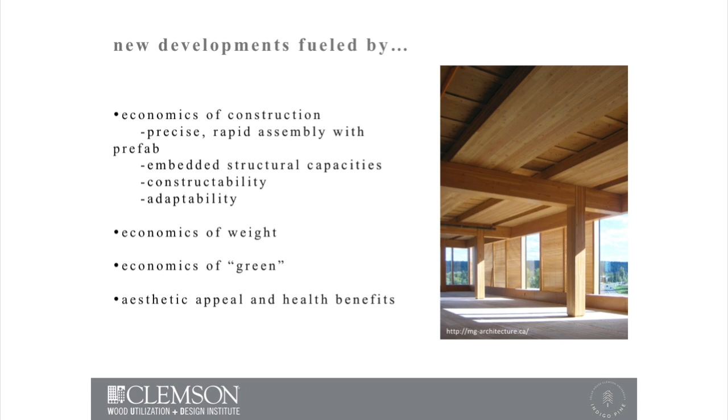And then there's just the aesthetics and the health benefits. Jeff mentioned this morning some of the humidity regulating benefits. There are other studies done by, for example, FP Innovations up in British Columbia that look at the appearance of wood and its effect on regulating stress indicators. So there's some good research out there on health benefits related to wood usage in our interiors.

These developments and the expanding use of wood and timber systems are enabled by our building codes, which have grown more accepting of mid-rise and hopefully eventually high-rise construction. The acceptance and recognition of CLT and massive timber within Type 4 construction is a considerable development.

And then there's CNC milling technology. CNC stands for computer numerical controlled. We've had CNC machines for years, 3-axis machines, meaning X and Y and up and down. 5-axis machines that are more prevalent in the massive timber world have all those functions plus a rotational axis in each direction. So without having to take big pieces off the bed, you can flip them around and drill. The technology is there to do really sophisticated operations from the production standpoint.

Some of the sustainability benefits - we won't rehash this in depth - include the renewability of wood as a material, the life cycle assessment and embodied energy part of the equation, and carbon sequestration. All of these things are motivating this shift, which has been happening for years in Europe and then into North America, particularly in the Northwest, and it's migrating down. This resurgence - somebody used that word earlier, Steve did - of wood and timber construction.

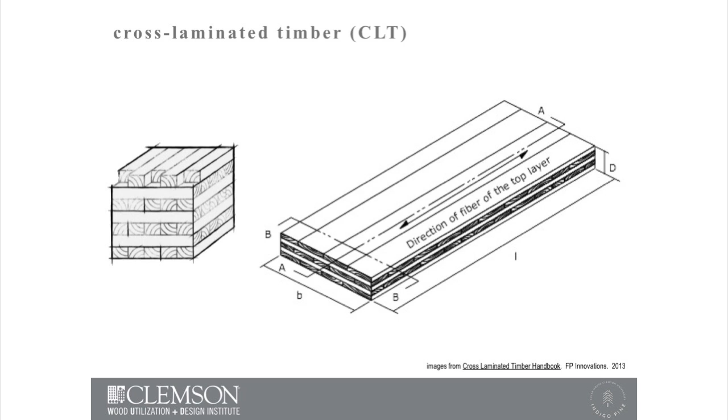So you're getting the benefits of cross-lamination, which provides greater dimensional stability for these panels. It's incredibly strong, incredibly lightweight relative to competitors like precast, and it's really exciting. Things like doors and window openings can all be pre-processed and pre-cut using the CNC capabilities we have. So you're looking at a game changer in terms of on-site construction time.

Looking again at the advantages: the prefab, the ease of installation, that's shorter on-site construction times with really small crews - we'll look at an example. In those scenarios, CLT becomes a very economical choice for mid-rise projects, any project with repeatable units, where there's embedded economy in producing repeated wall sections. Prefabrication also provides unparalleled quality control and unparalleled precise tolerances.

The bidirectional aspect of CLT makes it capable of larger spans without additional structure. It's also very strong in shear, et cetera. So there's the carbon sequestration we mentioned, and it's very lightweight, which by comparison allows for reduced sizes on the foundations. That's considerable - not to be overlooked in terms of economics.

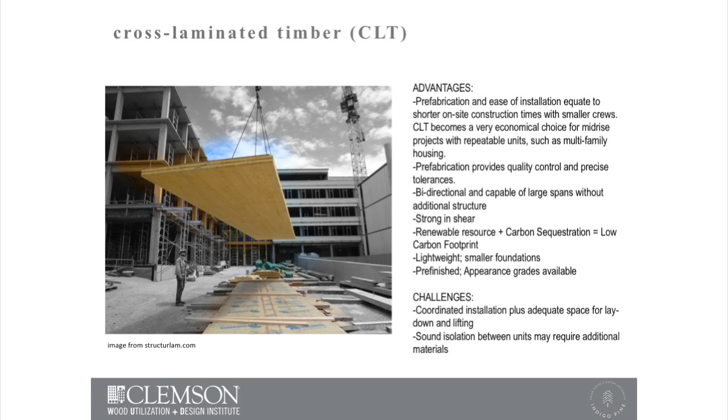Challenges, as with any large-scale prefab system, include the coordination and installation on site, making sure you have adequate space for laydown, et cetera. Another big one is sound isolation between units, and we'll see in one example a common way of providing sound isolation between floors, whether in an office structure or between floors in a residential application. I mentioned the CLT handbook - this is produced by FP Innovations and is available to download for free online.

So this is a project, 24 Murray Grove. It's in London, an apartment building designed by Waugh Thistleton Architects. The CLT panels came from KLH, which also has an office in London, but I think they were produced in Austria for this project. This was one that really started to make waves internationally and raise the level of interest here in the United States.

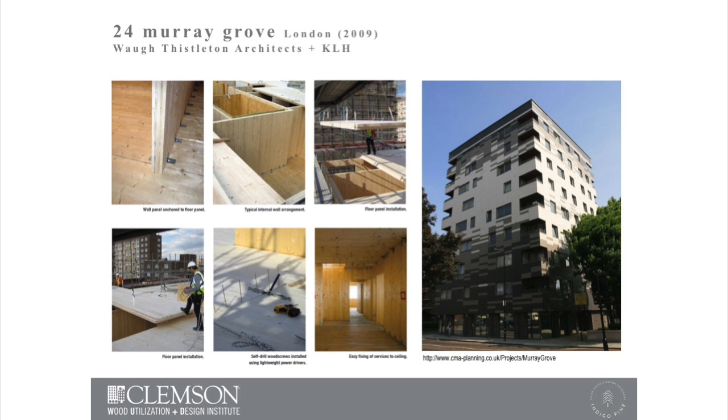So you see some images here from the construction, and I'll start to dig into a little bit of the metrics. So it's 8 stories of CLT framed apartments above, again, a non-combustible first floor, in this case concrete. The 8-story CLT framing was completed in 27 working days with a crew of 4 people, which is really mind-boggling. This crew of 4 included the crane operator and 3 others who were just maneuvering the panels into place and fastening everything down. So again, super rapid construction with small crews.

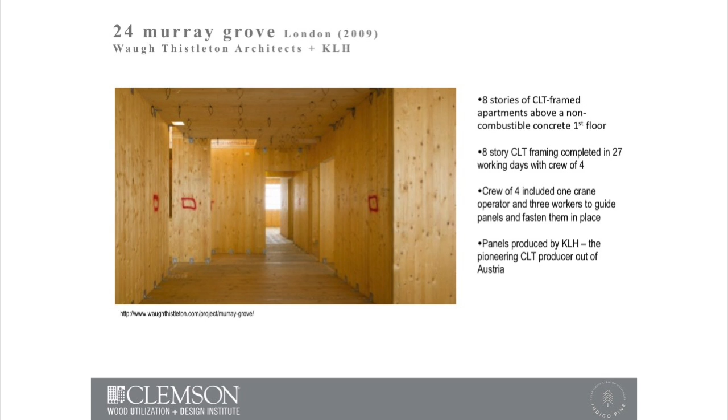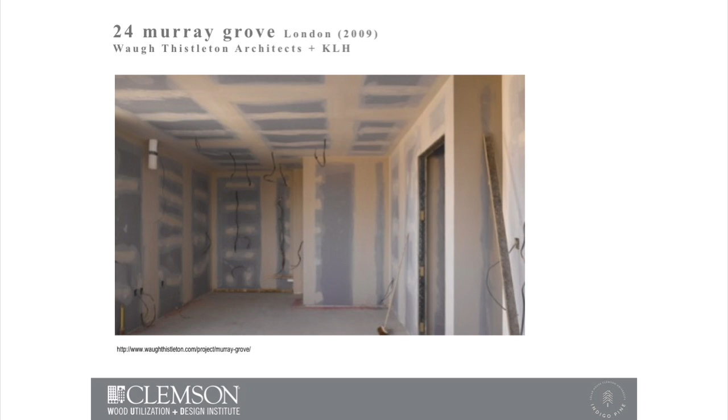So that's cross-laminated timber in a nutshell. We'll see maybe 1 or 2 other projects here in a moment. Another variation on that, again, it's a massive timber system. Solid wood is nail-laminated timber, or NLT. This is produced - this is a good diagram, and it comes from StructureCraft. StructureCraft is a producer of massive timber products in Canada. So in this case, rather than gluing and rather than the cross-lamination, you're just stacking these edgewise and nailing.

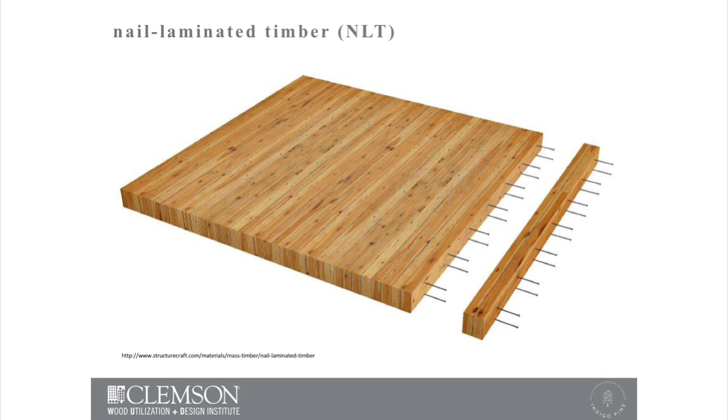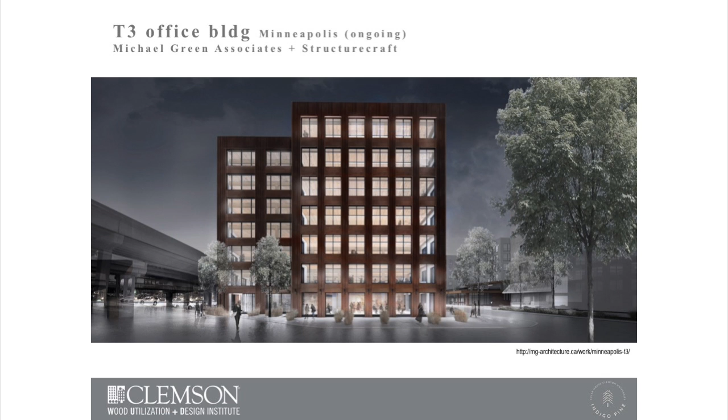So this is the T3 office building in Minneapolis. You see a rendering here. This will be a 7-story construction, over 200,000 square feet, using a combination of nail-laminated timber as well as glue-lam. You see the glue-lam kind of post and beam structure here underneath, and then there's the nail-lam panels for the floors. Now what you'll notice is that these floors are topped with concrete.

So there's a concrete finish layer that is, well, it's more than a finish layer really. This works as a composite system, but the concrete in particular is used for sound isolation. That helps add mass and helps increase both the IIC rating and the STC rating, which are influential for these massive timber applications. STC is airborne sound transmission, and IIC is structure-borne sound, so footfall, vibrations, and those kinds of things. So a lot of times what you're seeing with these leading-edge architects working with mass timber are these kinds of hybrid uses of materials for these purposes.

There's approximately 3,600 cubic meters of wood used in the structure. That equates to around 3,200 tons of carbon sequestered for the life of the building. The timber erection is scheduled to be completed in just 2.5 months, so that's an average of 9 days per story for the timber frame. And then you see some of the other metrics there as far as quantity of panels, and so on and so forth. In this case, most of the wood is beetle kill pine, so it's a good way to reuse that material.

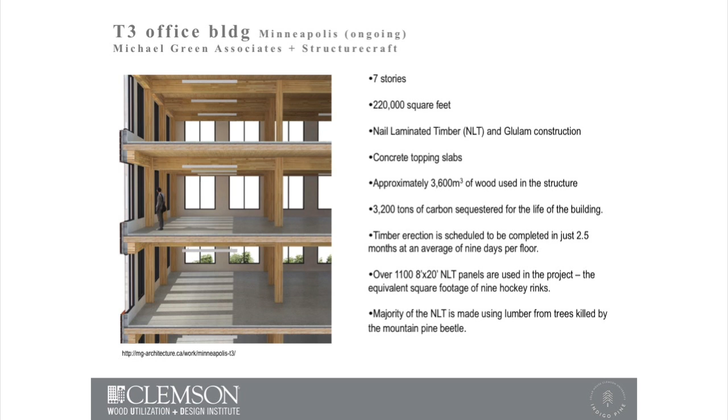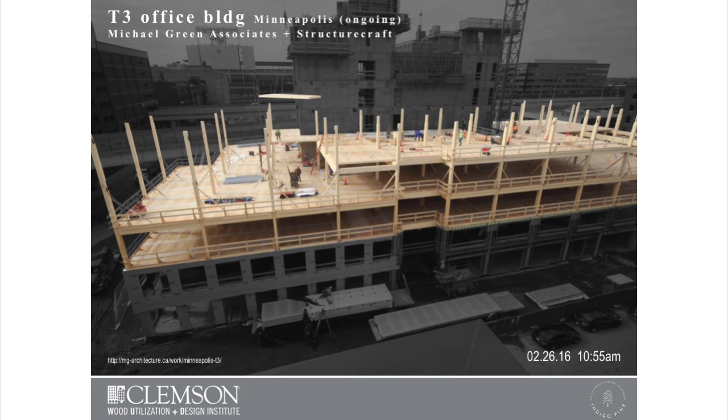Here's an image - this was from Michael Green's website, they've got snapshots from the construction. This was February 26th of this year, around 11 o'clock in the morning. So you can see some of the non-combustible construction below, and then they're coming up pretty rapidly with this wood frame construction. What you don't see are lots and lots of crew - again, it's a light crew and really rapid on-site work. Here's the crane operator doing his thing, and then a couple guys here to help guide these into place. If you look carefully, you can see the nail lam lined up edgewise, and that's how that system works.

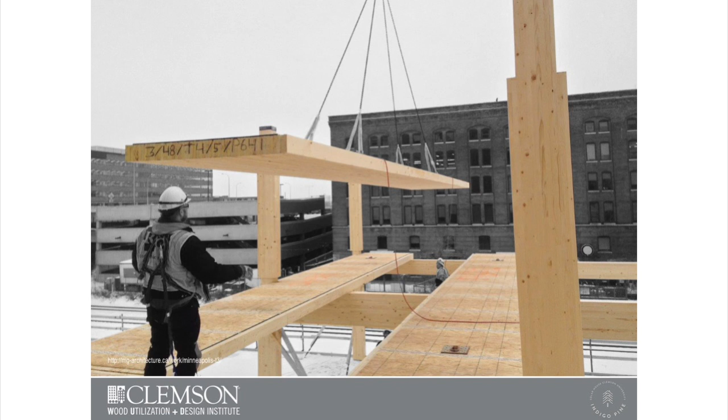Another similar system to nail lam - we've all seen and touched glue lam, beams or rafters, that kind of thing. Structurecraft in particular is now making glue lam panels, so they work like the nail lam, but they're glued instead with really high strength adhesives. Adhesive technology is something that we started to look at here at Clemson as well, just the fire performance of those things. The adhesive technologies are getting better and better and greener as well to support the larger movement in the industry.

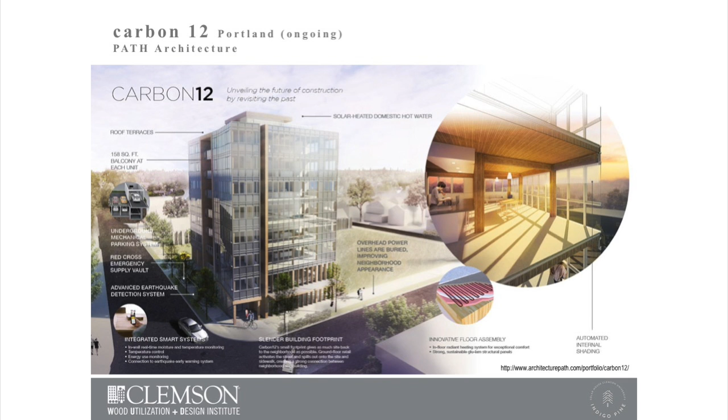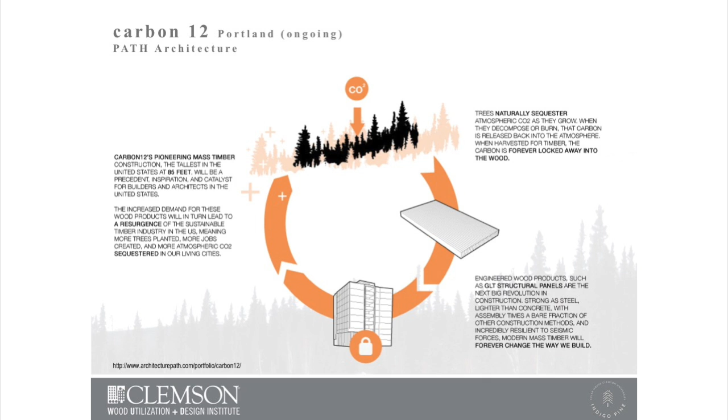This is a new project ongoing in Portland by a group called Path Architecture. The development's called Carbon 12. You see some of this is a snapshot from Path Architecture's website, getting into detail for their clients, assisting the developer in raising awareness of the environmental benefits of this approach. The next image describes the life cycle benefits, the carbon benefits of wood, carbon sequestration, the things we've been learning about today. This is really a part of the marketing for these types of systems, driving these technologies forward. That's Carbon 12.

This comes from a report from Dovetail Partners, and they borrowed this table from Rethink Wood, a really great resource sponsored by the Softwood Lumber Board. This is just a listing of some of the tall timber structures that are already out there or going up currently. Steve mentioned the project at University of British Columbia, I don't know if that one's in this list, but you do see the Carbon 12 project.

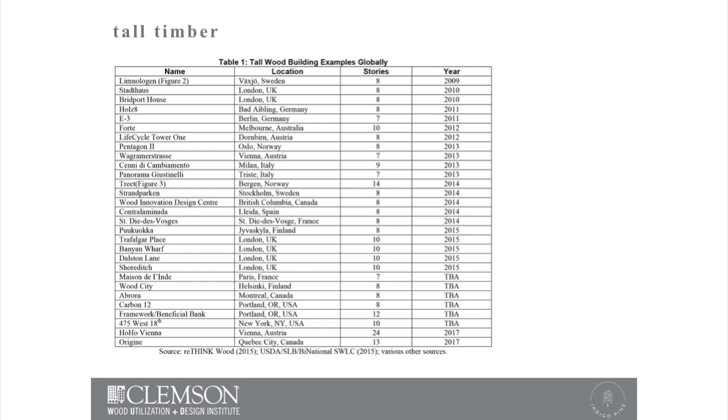It's a 24-story structure being constructed in Austria. I hope to visit that this summer. This is really a worldwide thing, motivated early on in Europe, but it's really moving to North America now. It's an exciting time to be in the wood industry.

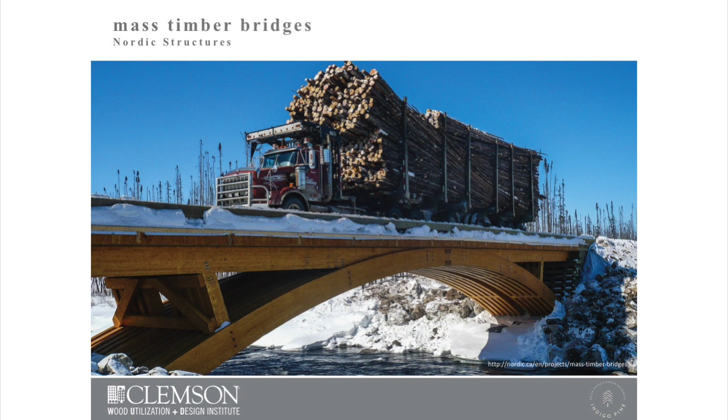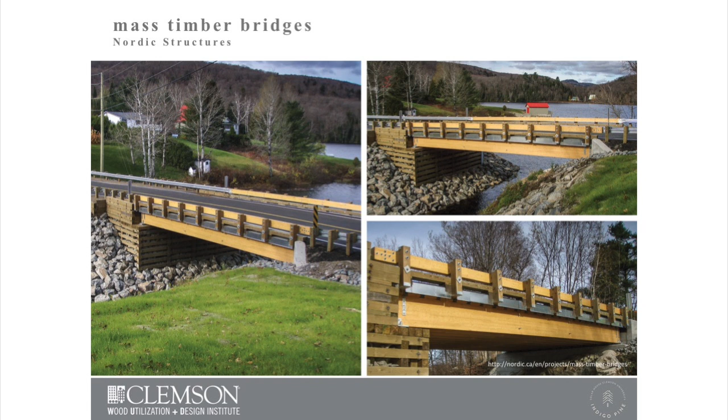There's another of their bridges. These things are erected very quickly. This is a smaller scale, and this one can be set on the abutments, similar to the video Pat showed, and you're in and out - it's super quick. Again, a great application for these technologies.

From Nordic's website, they talk about reduced delivery times using local sourcing, members and system size to the nearest millimeter - those really precise tolerances, drawing on current manufacturing technologies. Then there's the reduction in project duration - time is money on site, so really fast erection and installation times, no need for heavy equipment. This is where these things are competitive.

What's the preservative for those type of structures? That's a good question, Pat. I think that they're not preserved as we would call it - if I remember correctly, they're using a covering on them like asphalt or something like that, but I've not seen them in person so I'm not going to say definitively. They're not conventionally treated, and underneath they make sure they're not grounded so air can circulate. The adhesives they're using are exterior adhesives rated for all those kinds of applications. But that's a good question about the preservative.

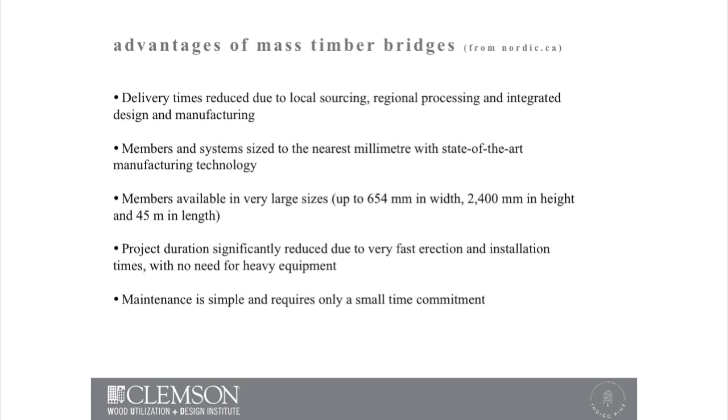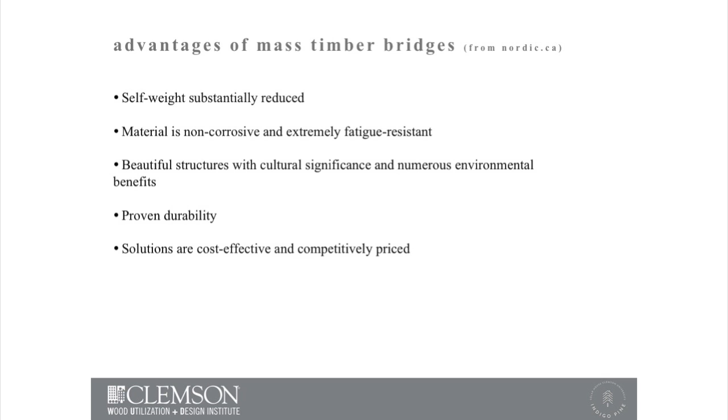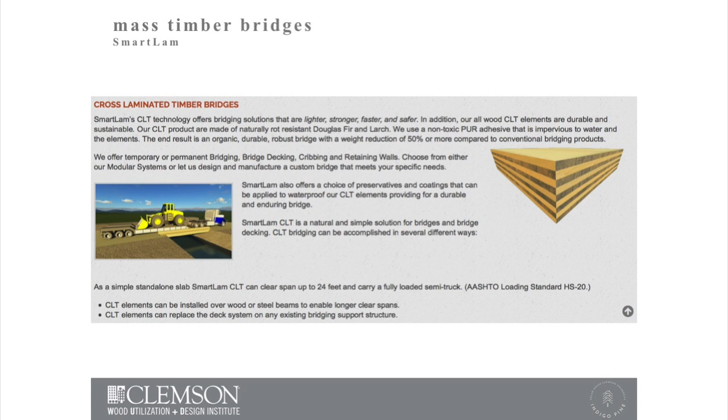And self-weight - we talked about the weight being substantially reduced, so on and so forth. Really great competitive advantages for these mass timber bridge systems. This, we saw the video from SmartLam - this is from their website, where they describe being able to span up to 24 feet, carrying a fully loaded semi-truck, with a reduction of up to 50% in weight. These things have a ripple effect in terms of applicability and viability compared to competing materials and systems.

Continuing with SmartLam, they're getting into modular systems, modular construction, offering modular shelters for ag applications, and modular loafing sheds, interestingly enough. We saw some of the modular barn structures that Pat showed earlier, just the renderings of. This is a really interesting group - we've had many opportunities to visit with some of the folks, and they're up to some interesting things.

I'm going to have the opportunity in the fall to work with John Blackburn, an alumnus of Clemson who works in Washington, D.C. and designs equine structures all over the United States. This is a prefab barn structure he's designed and is looking to market, combining dimension lumber with glulam posts and beams for larger spans. These are really exciting applications in the area of ag and equine. I'm looking forward to learning a lot from John this coming fall.

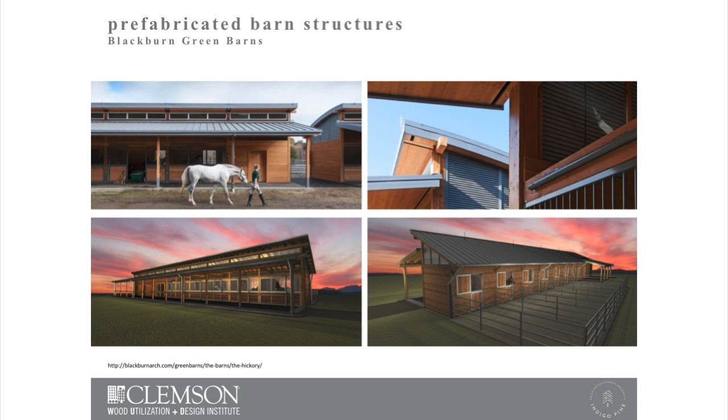More and more you're seeing it used, with this resurgence and interest in wood and all of its sustainable benefits, in park structures. I was just in Virginia helping my mom move, and just down the way from her was a really nice little glulam picnic shelter. So there's lots and lots of opportunities out there.

Glulam is something we're more familiar with versus CLT and some of the more cutting-edge systems, but it's all in the realm of mass timber, and there's a range of applications for this stuff.

Just really quickly, some of the things we're working on here at Clemson: we're looking at cross-laminated timber using southern pine, something that hasn't really been studied extensively as we're working on it. There's some work at Virginia Tech, some at NC State. We had a master's student who graduated a couple years ago looking at long span floor systems that would sandwich glulam web members between two flanges of CLT. That's exciting - there's potential to integrate mechanical and plumbing systems into those cavities.

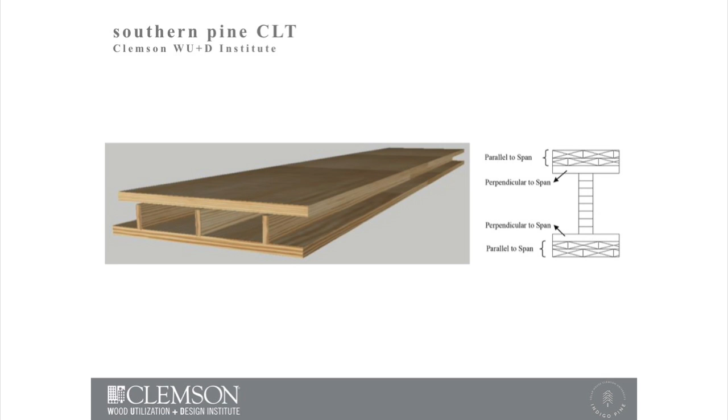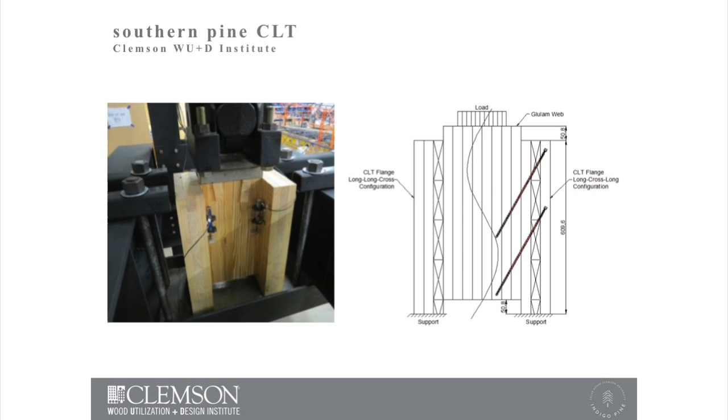We've done some pretty extensive testing through his thesis work on the shear capacity, the shear transfer from those flanges to the webs. He looked at both a glued connection and a mechanically fastened connection. That's an interesting area, and we're getting ready to do some full-scale tests on these panels. As I mentioned, we've done some fire-related testing and work, looking at the fire capacity of the different adhesives commonly used in the industry.

Pat alluded to some work we've done recently, more so in the area of light frame construction. This Simply is the name we've given to this really innovative plywood framing system. This was a system we developed for our entry in the U.S. Department of Energy Solar Decathlon competition. The DOE in this competition is really squarely focused on energy, on end usage of energy.

But they're not as interested in the embodied energy, the energy equation for moving these houses, these kind of modularly built houses, from point A to point B, and then moving the modules around with cranes on site. So we aimed to rethink and think more holistically about the energy. How can we work with a system more analogous to inline light wood framing that can be built on site rapidly, leveraging CNC technologies to their greatest advantage with respect to connection design.

So these things go together super fast. The frame of this house, which we call the Indigo Pine House, was put together entirely by students and faculty - unskilled labor - in 3 shifts, about a day and a half. We started a dry-in from that point. We imagine this as a flat pack type system that would come shipped with pictographic instructions, just like IKEA furniture. We've actually garnered a lot of interest from industry.

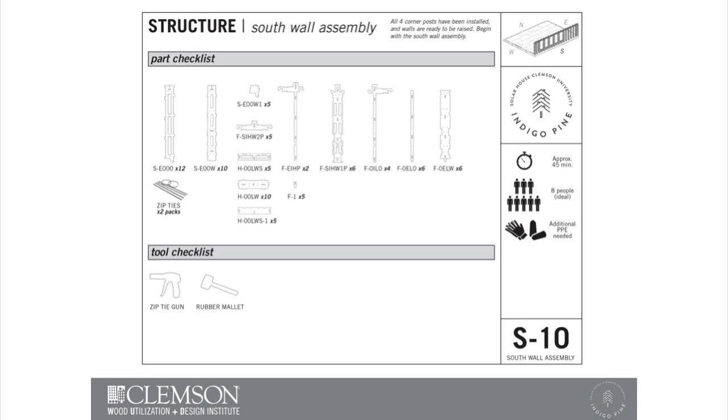We're continuing to develop the system. These are examples from the instructions for how this would go together - everything from the parts and pieces, all pre-labeled through the CNC processing, thinking about how many people it would take for different operations, and the type of safety equipment you need.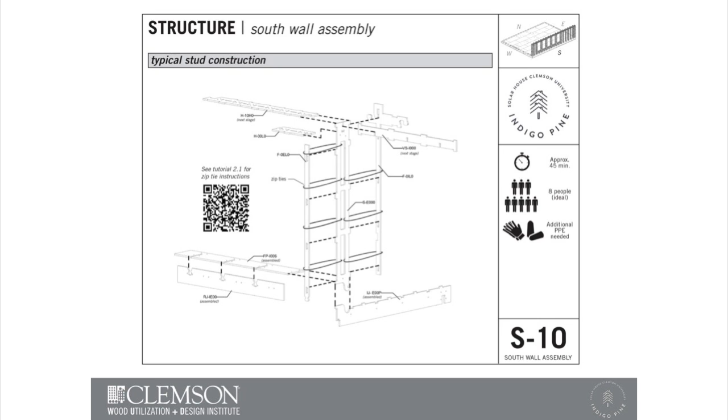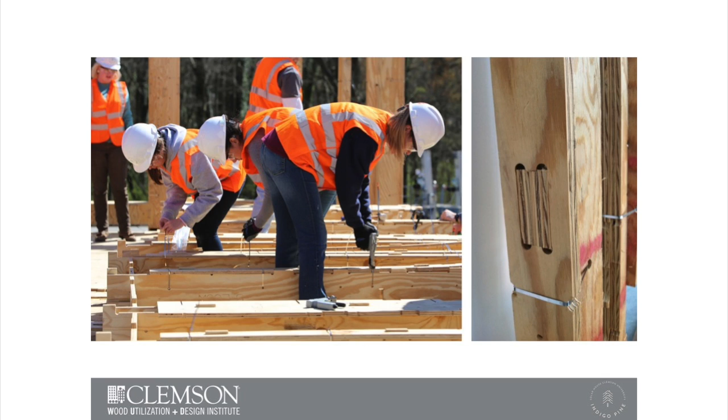There are even QR links to instructions and YouTube videos of how to do these. This system is held together without nails or screws, just steel cable ties, so it's fast, reversible, and non-destructive in terms of disassembly. We disassembled the entire frame and repackaged it in less than a day. So, again, the benefits of plywood.

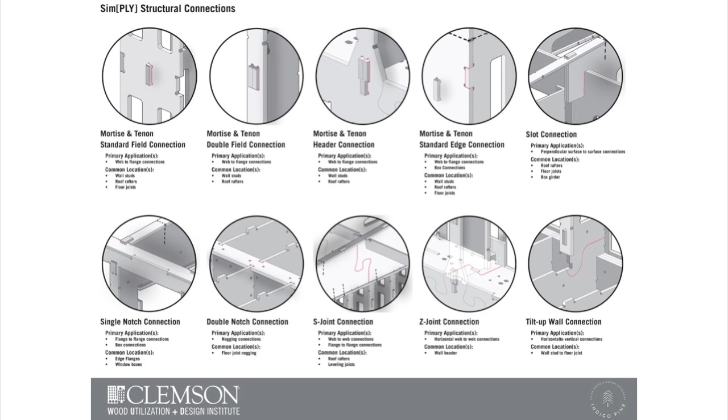Let's get through some of the joinery that we developed. The crop stop kitchens, one of those structures that Pat had alluded to, was built with the Simply system. This is in Greenville nearby.

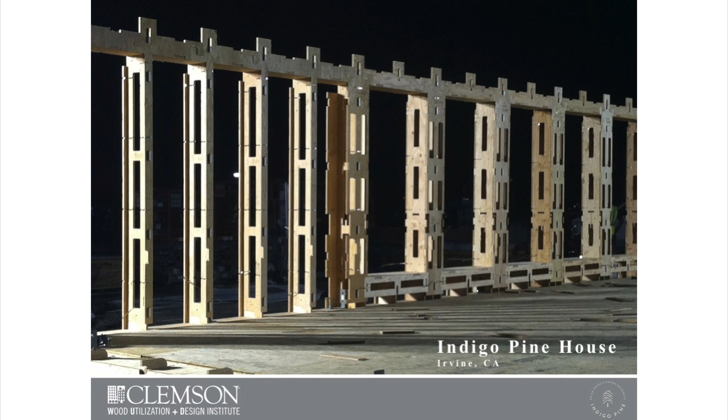This is the frame of our competition house, the south wall going up, and then a view from the interior. The house was only together, after 2 years of work, for about 2 weeks out in Irvine, California. But fortunately, we're about to rebuild it down in Pee Dee.

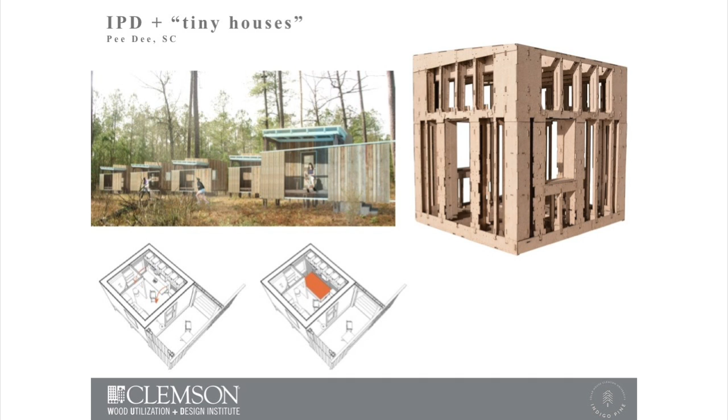Clemson has an agriculture research center there, and they want to house more graduate students, so we'll be rebuilding the house because it did come down non-destructively. We'll be in August reconstructing that, and they're interested in a few other little kinds of structures.

So we've designed these Simply tiny houses that will be built in the coming years to house up to, I think, 16 graduate student researchers there. There's some exciting work, again, leveraging available technologies, a commitment to using engineered wood products for their sustainable benefits. And in this case, working with super lightweight pieces that one person can carry in their hand. So I wanted to give the broad spectrum, the range of applications, and give you an idea of what we're working on here at Clemson.

Some resources for you: I mentioned Rethink Wood, Woodworks, Dovetail Partners, really great resources through all these websites, white papers written on a variety of topics, such as the modern tall wood buildings paper from Dovetail. One book, Solid Wood, as far as case studies - a great book by Joe Mayo, a practicing architect in the Seattle area. And then a report done by ITAC and the University of Utah recently, very thorough case study research on the economics of these mass timber structures going up around the world, specifically in North America - the solid timber construction paper there.